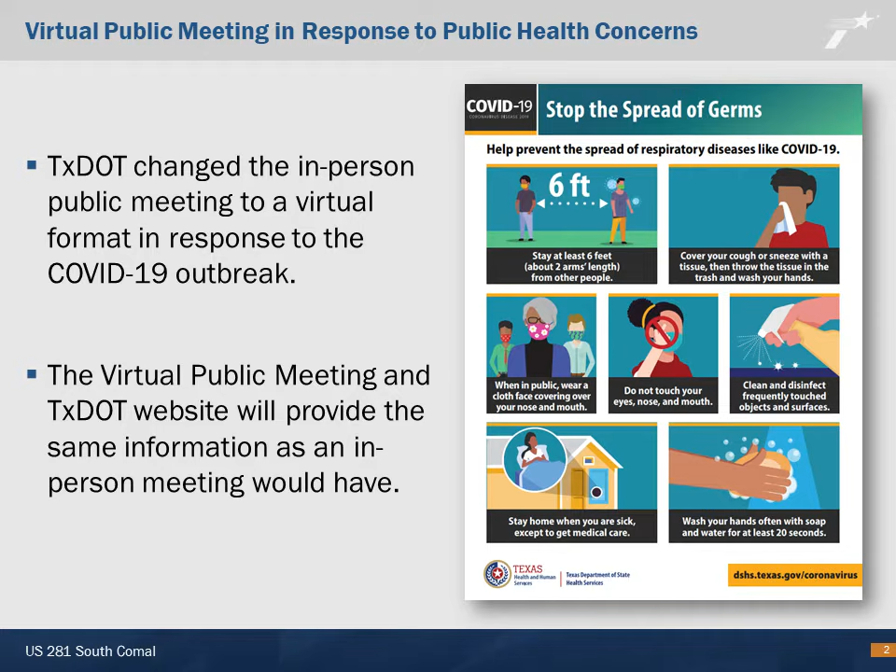Questions or comments may be submitted to the US 281 South Comal project team at any time during project development. However, to be included in the official public meeting record, all comments must be postmarked or received by Wednesday, June 2, 2021. Written comments may be submitted online as part of this virtual public meeting under the Participate tab, or may be submitted by mail or by email to the US 281 South Comal project team. Attention to Jackie Lopez at 5835 Callahan Road, Suite 200 in San Antonio, Texas 78228, or to US 281 Comal at

pozcam.com. Responses to comments received during the public comment period will be provided in a documentation of virtual public meeting report and will be available for public review on the project's website at www.TxDOT.gov, keywords US 281 South Comal, once it has been completed.

The limits of the proposed project are on US 281 from East Borgfeld Drive to SH 46 for a distance of approximately 6.3 miles. The project limits are located within the cities of Bulverde and San Antonio in Comal and Bexar counties. In order to construct the project and tie into the existing US 281 outside of the project limits, construction would extend approximately 0.2 miles south of East Borgfeld Drive and would extend approximately 1.7 miles north of SH 46.

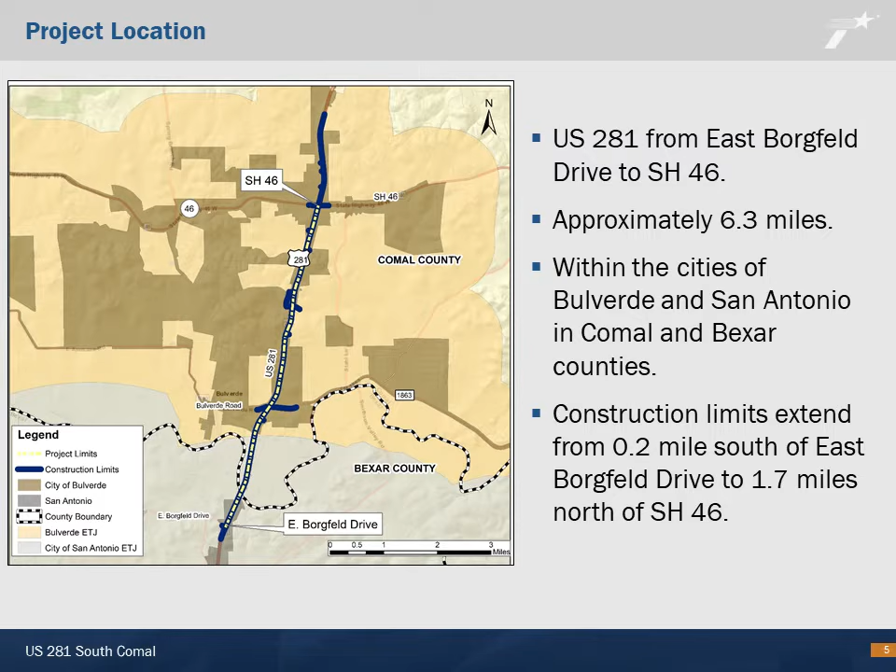Currently, US 281 is a 4-lane highway with 2 lanes in each direction and a large grassy median. The existing right-of-way width is approximately 225 to 315 feet. Within the project limits, there are currently no frontage roads along US 281, and the roadway operates as a non-controlled access highway. Drainage is accommodated by an open ditch drainage system. There are existing overpasses on US 281 at East Borgfeld Drive, FM 1863, and SH 46.

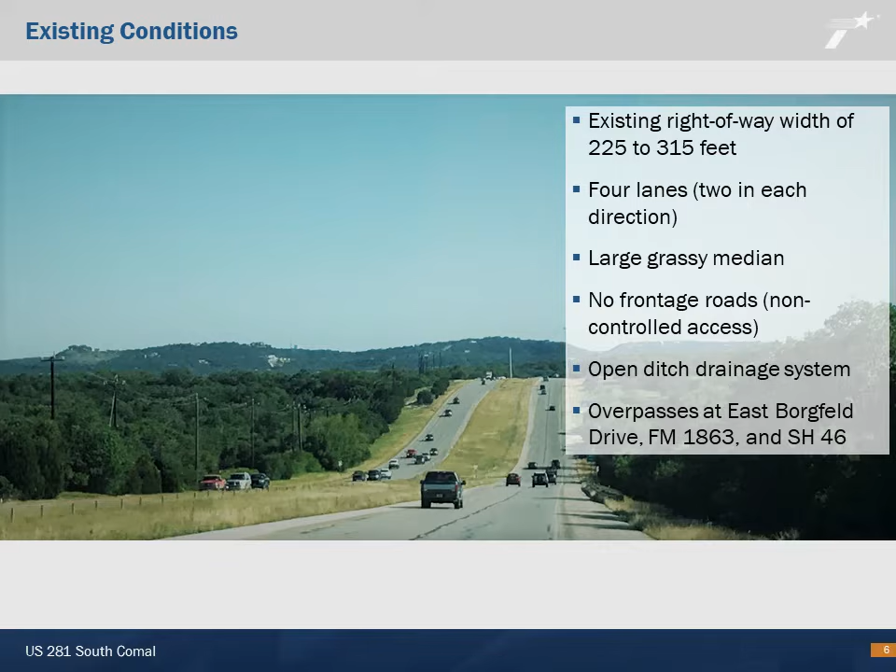Here is an existing typical cross-section of what US 281 typically looks like today. As you can see, US 281 consists of 2 12-foot travel lanes in each direction with inside and outside shoulders separated by a large median. No bicycle or pedestrian accommodations are currently provided along the corridor.

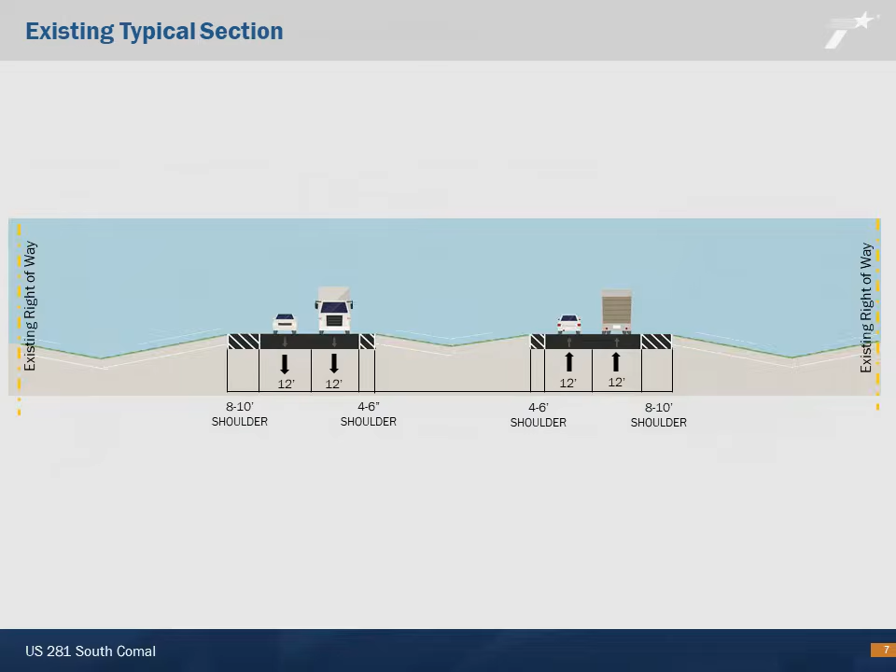The US 281 South Comal project is needed because US 281 between East Borgfeld Drive and SH 46 is experiencing population growth and an associated increase in traffic congestion, resulting in reduced mobility and safety. The increased population in the project area has led to an increase in the number of businesses, driveways, and cross streets along US 281, which increases the possibility for crashes along the corridor. The purpose of the proposed project is to relieve traffic congestion, improve mobility, and improve safety on US 281 within the project limits.

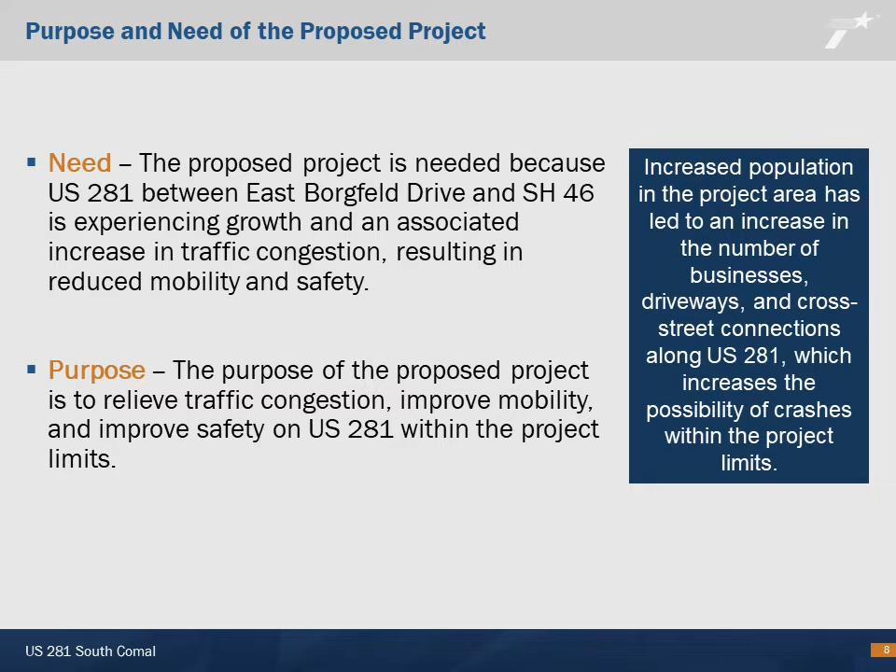Under implementation of the proposed project, US 281 would be expanded to a 4-lane freeway with 2-lane frontage roads in each direction, with space in the median that could accommodate future transportation improvements. Now, let's watch a short video that describes the major components of the proposed project.

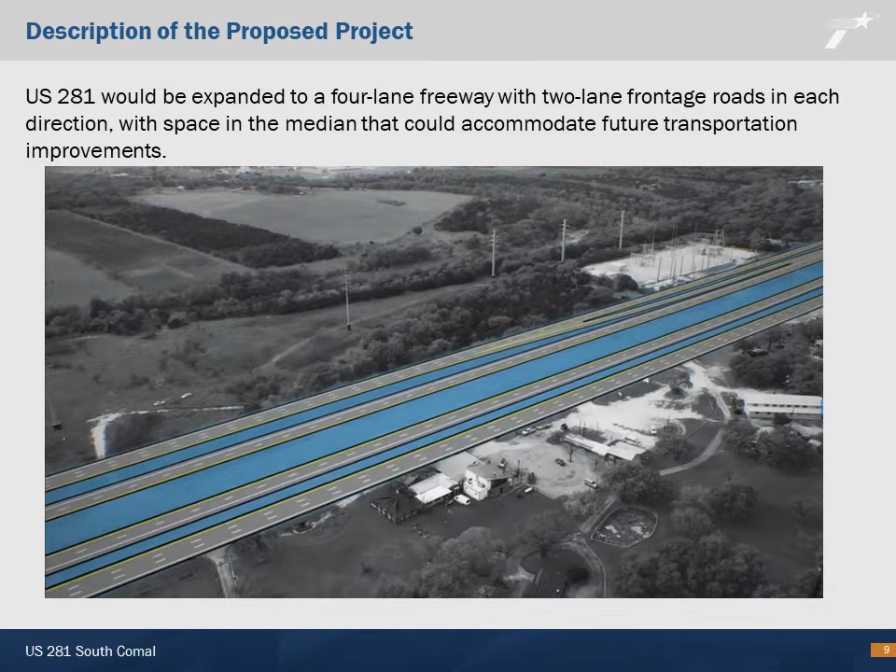Things are changing near US 281 in Comal County. The population is growing almost 5% every year. That's twice as fast as the Texas average. And over the next 30 years, traffic on 281 will double.

Many drivers already treat this road like a freeway, but it isn't designed like a freeway. With dozens of driveways in Comal County running directly into US 281, local drivers don't have enough space to merge on and off the road.

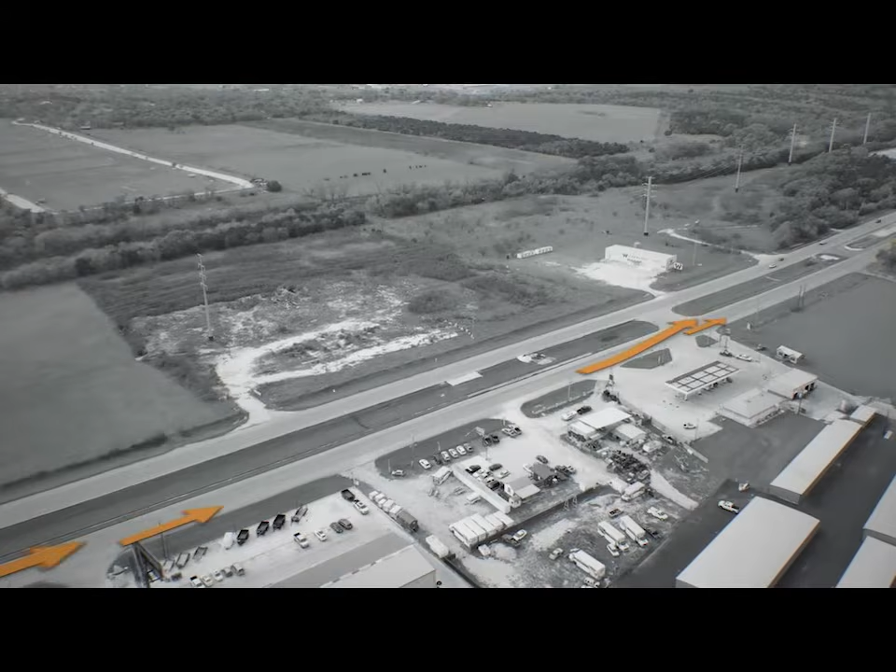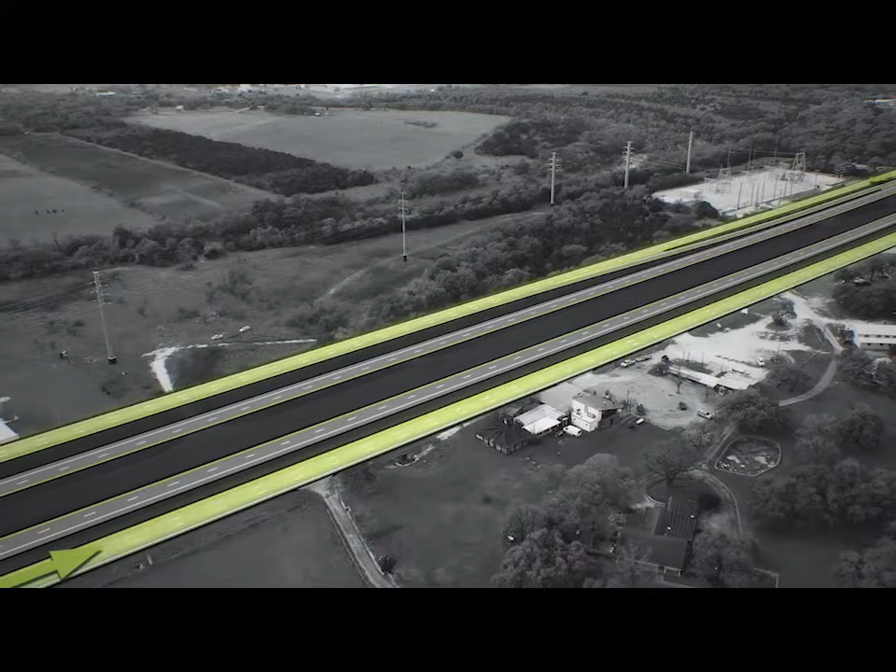To stay ahead of this growth and improve safety, TxDOT has been converting US 281 to a freeway in Bexar County and will now extend that freeway an additional 7 miles to Highway 46 in Comal County. As part of this improvement, new frontage roads will protect local drivers and driveways from faster commuters passing through the county. Existing interchanges will be adapted to the frontage roads to maximize efficiency for drivers.

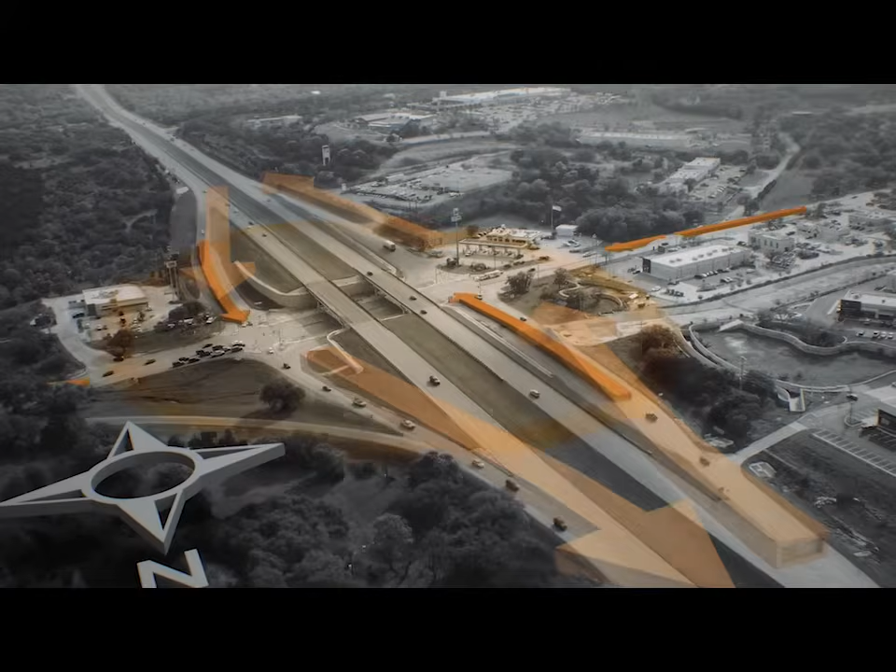For instance, at the current Highway 46 interchange, on and off ramps are in a standard diamond shape, which directs all merging traffic into the same area. The new design takes these entrances and exits and distributes them up and down US 281. This decreases congestion at Highway 46 while increasing access to businesses and neighborhoods along the corridor.

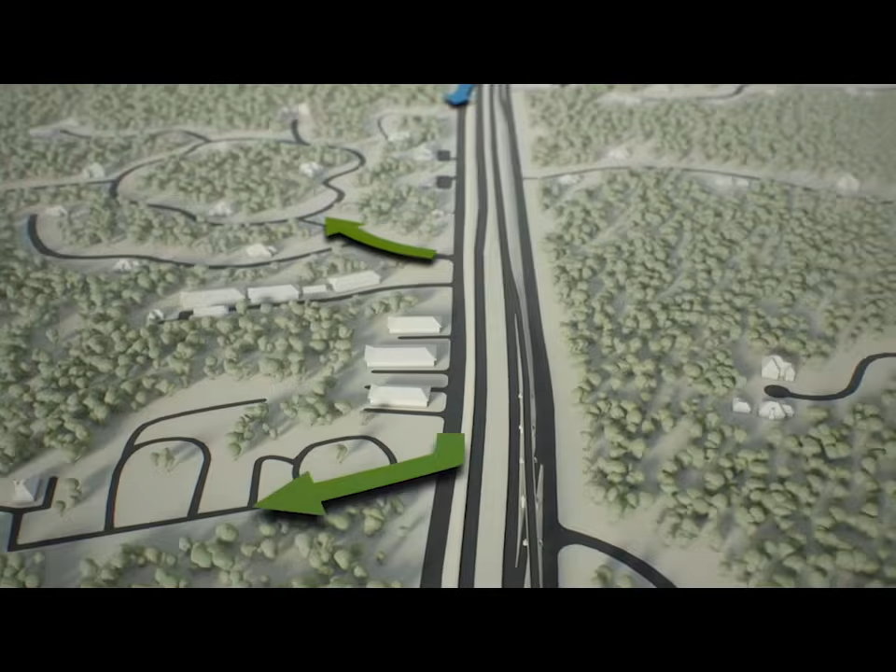In addition, the on-ramp near Bulverde will pass over the off-ramp. This configuration reduces cross-traffic on the frontage road while simplifying travel for vehicles getting on and off the new freeway. To the south, drivers on Casey Road and Mustang Vista will still be able to cross 281 thanks to a new connection under the freeway, making it easier and safer for east-west travel.

Computer models predict that keeping the existing design would lead to dramatic increases to travel time in the near future. The new design, however, virtually erases that increase, and this difference will become even more notable in the years that follow. Meanwhile, separating high-speed from low-speed traffic should reduce driveway-related crashes by 63%, while the Casey Road overpass should reduce nearby crashes by 65%. Not surprisingly, these significant upgrades will require us to widen the road.

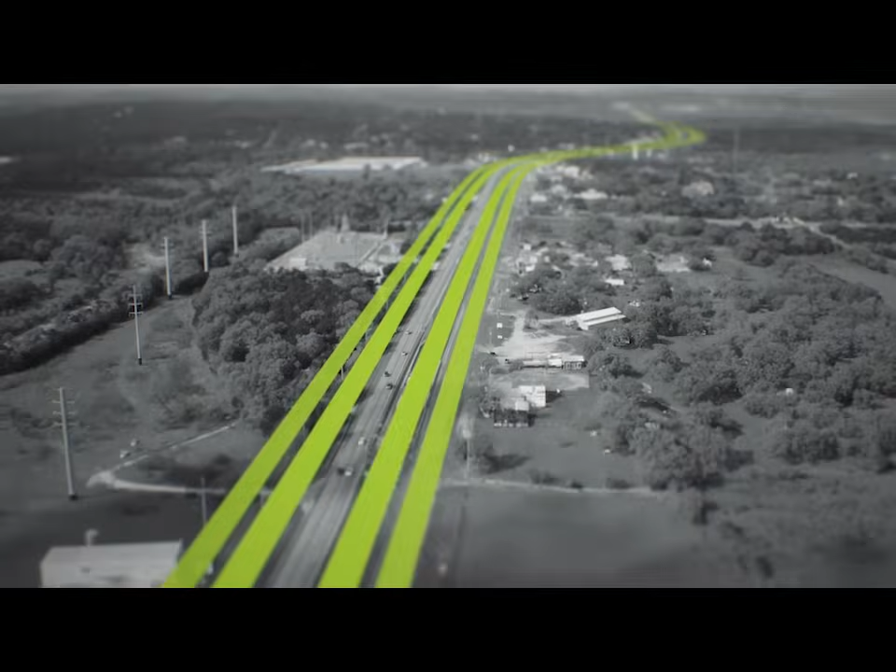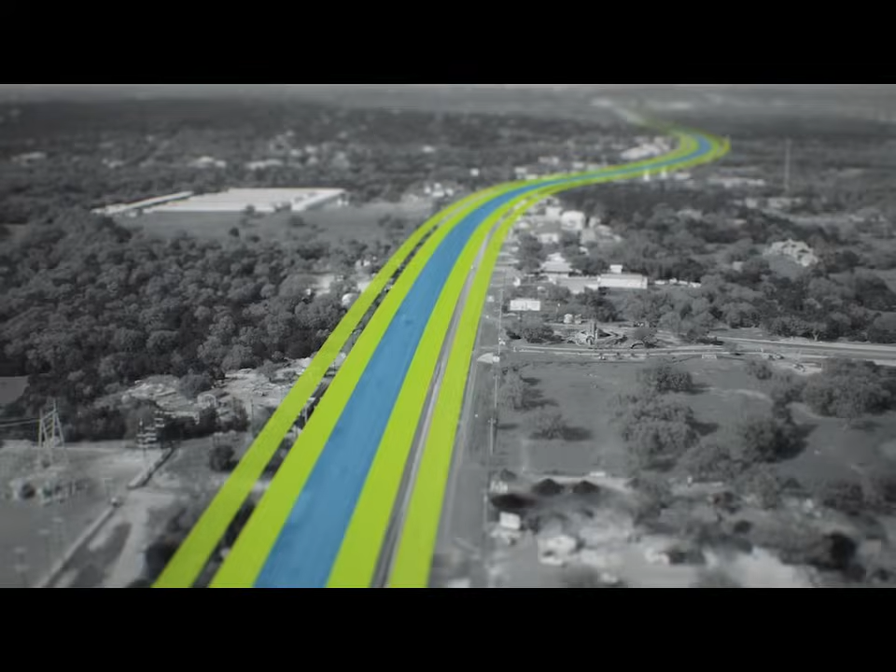And we've been working hard to minimize this impact on surrounding areas. For instance, rather than simply widening equally on each side of the road, the new freeway and frontage roads move back and forth in relation to the existing road, adapting to natural features and properties. The improved design also incorporates extra space between lanes. This will allow us to make future improvements without changing the new footprint.

Extending improvements on 281 into Comal County will lay the foundation for transportation needs in this area for decades to come. Another example of how TxDOT is connecting you with Texas.

As you just saw in the video, the proposed US 281 would consist of a 4-lane divided freeway with 2 lanes in each direction, as well as one-way frontage roads with 2 to 4 lanes in each direction. Auxiliary lanes would also be provided throughout the project limits on the main lanes and frontage roads where needed. At cross streets, intersections, and major driveways, turn lanes would be provided.

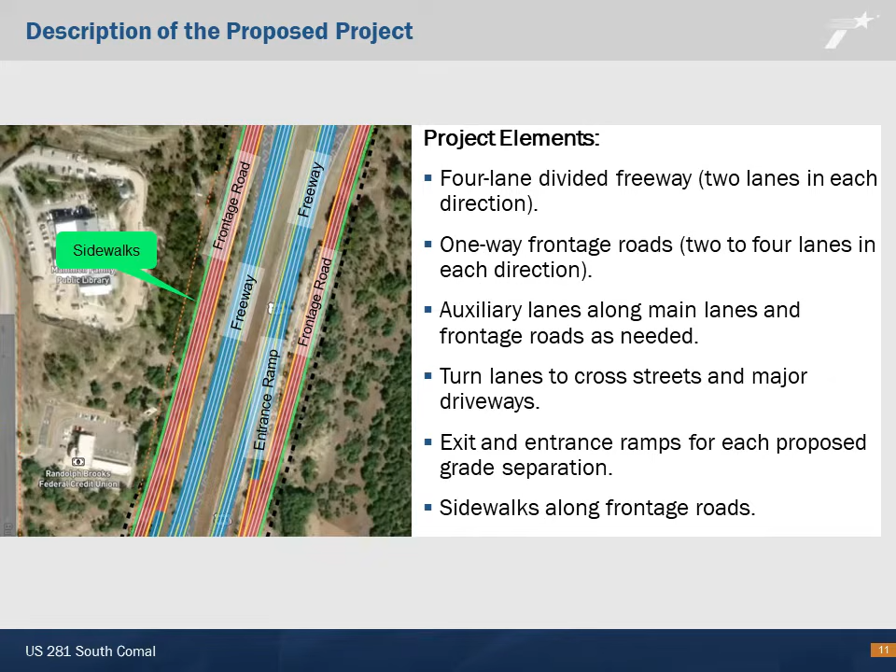Exit and entrance ramps would be constructed at strategic locations along the corridor to allow vehicles to enter and exit the freeway. These ramps would be placed in locations that allow for access to the major intersections at the proposed grade separations. Lastly, sidewalks would be provided along the frontage roads.

As we've touched on, there are existing overpasses on US 281 at East Borgfeld Drive, FM 1863, and SH 46. At East Borgfeld Drive, an overpass is currently under construction. This overpass would remain in place under the proposed project. At FM 1863 Bulverde Road, the existing overpass would be improved by adding frontage roads and approach and departing lanes.

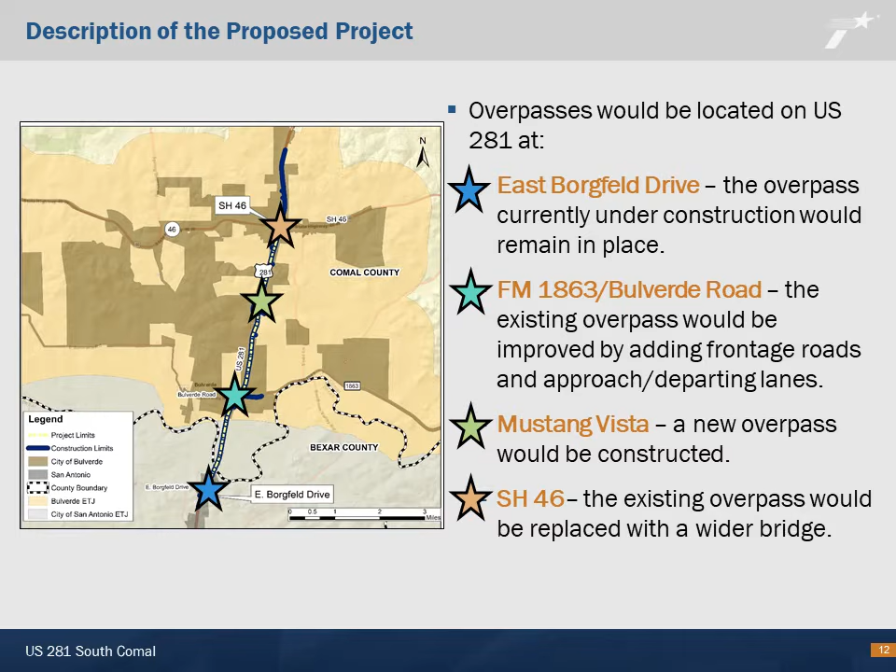At SH 46, the existing overpass would be replaced with a wider bridge to accommodate auxiliary lanes and future expansion. A new overpass would be constructed at Mustang Vista, as was described in the video that was previously shown. The project would also include widening of FM 1863 from US 281 to east of Wiley Road.

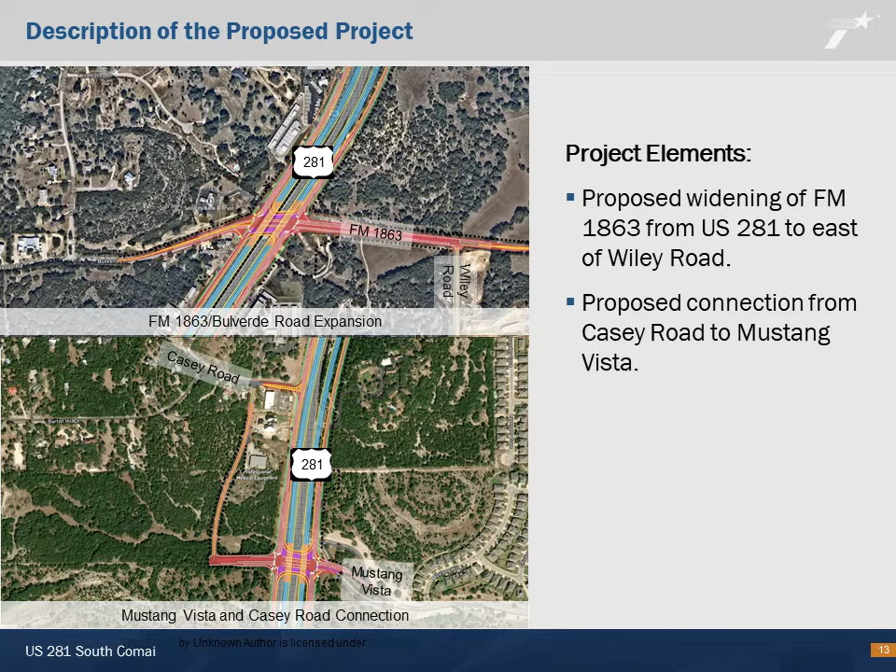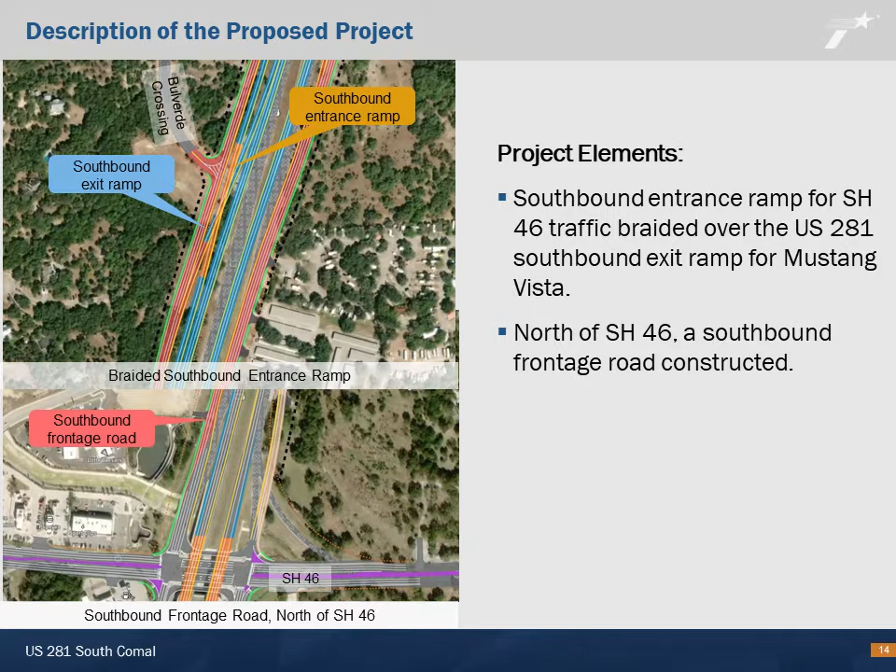In addition, a new extension of Mustang Vista on the west side of US 281 would be constructed, which would provide a connection from Casey Road to Mustang Vista. A southbound entrance ramp for traffic traveling from SH 46 would be braided over the southbound exit ramp for Mustang Vista. North of SH 46, a southbound frontage road would be constructed.

The proposed right-of-way width is approximately 400 feet, but varies down to 315 feet and up to 450 feet in certain locations. The proposed right-of-way line varies from approximately 0 to 200 feet from the existing right-of-way line, depending on the location.

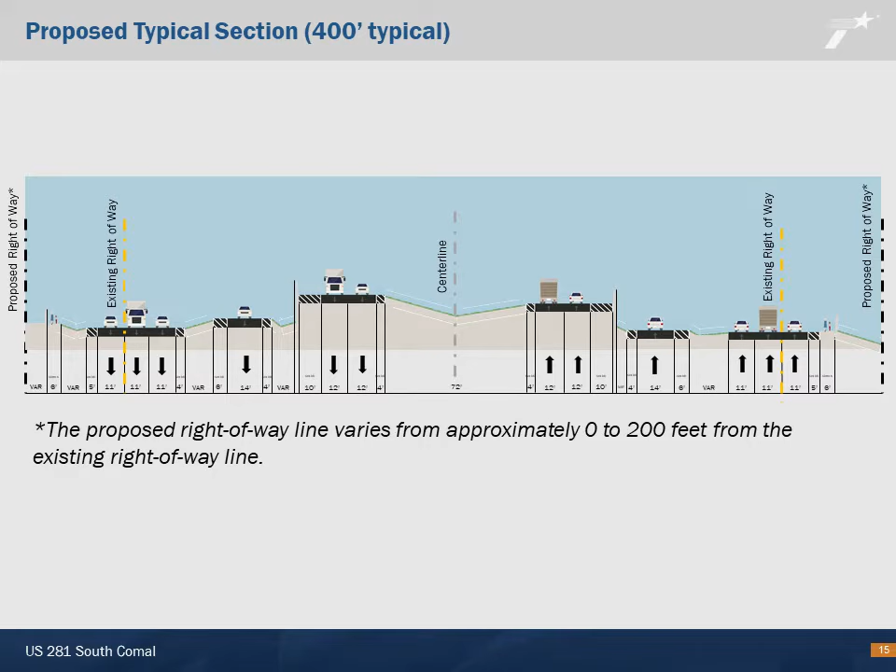One of the purposes of the proposed project is to improve safety on US 281 within the project limits. Many project elements are proposed that are anticipated to improve safety along the corridor. These include constructing an overpass at Mustang Vista, constructing frontage roads that provide access to driveways and cross streets, upgrading US 281 to meet freeway design standards, and providing sidewalks and crosswalks for pedestrians.

By upgrading US 281 to a freeway with frontage roads, local traffic would be separated from through traffic. Under the proposed project, vehicles would enter and exit driveways from the proposed frontage roads, which would have lower traffic volumes and speeds than what exists on US 281 today.

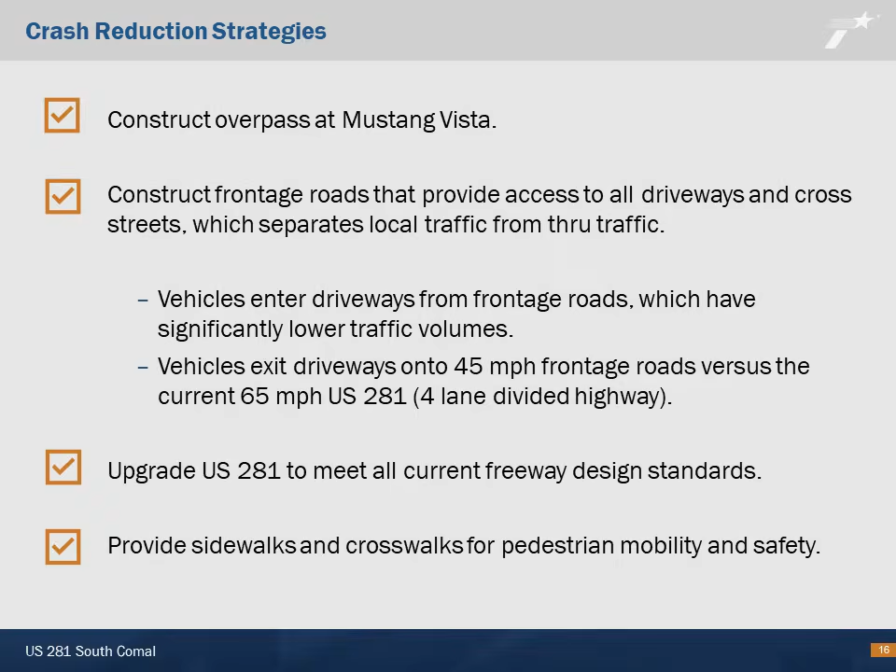Now, let's dive a bit deeper into the traffic analysis that was conducted as part of the project. Population and traffic growth have been occurring in Comal County and along US 281. Traffic projections done for the project anticipate that this trend is likely to continue into year 2049. In 2019, traffic volumes at US 281 and FM 1863 were approximately 62,000 vehicles per day, and at US 281 and SH 46 were approximately 57,000 vehicles per day.

Using predicted population growth rates for the area, future traffic volumes were projected for the corridor. This analysis indicates that by 2049, traffic volumes at US 281 and FM 1863 would increase to approximately 108,000 vehicles per day, which relates to a 74% increase from existing conditions. Similarly, at US 281 and SH 46, traffic volumes are anticipated to reach approximately 97,000 vehicles per day in 2049, which is a 70% increase from existing conditions.

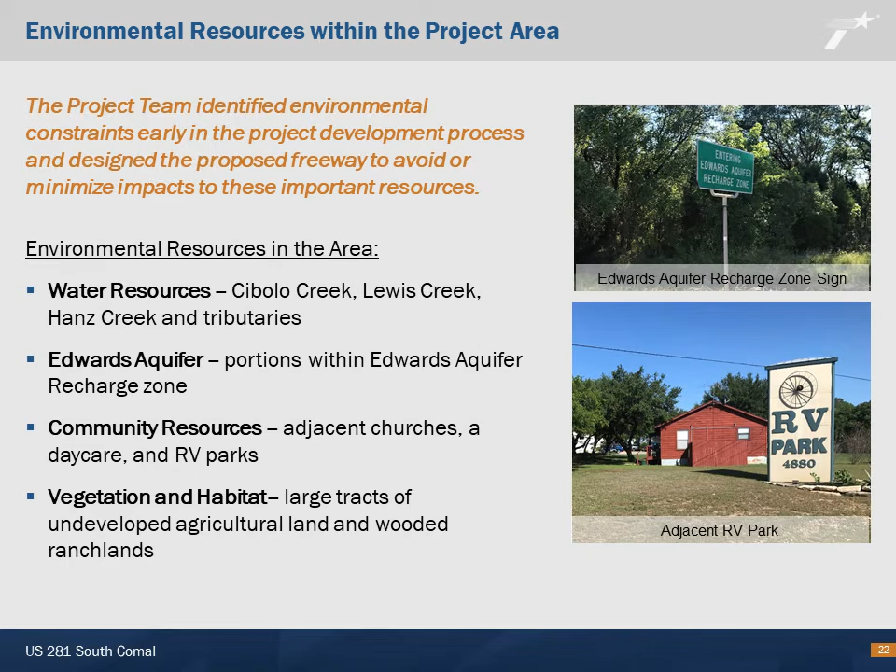A summary of some of the environmental resources located along the US 281 corridor and project area include several creeks and tributaries, the Edwards Aquifer Recharge Zone, adjacent churches, a daycare, and RV parks, and large tracts of undeveloped agricultural land and wooded ranch lands. Other environmental resources include an adjacent private cemetery and historic age structures, several noise-sensitive receivers, adjacent gas stations, fuel tanks, and auto repair shops, and portions of the project within a non-attainment area for ozone. Maps showing the environmental constraints in the project area that were considered during project design are available for download and review under the Review tab of the virtual public meeting.

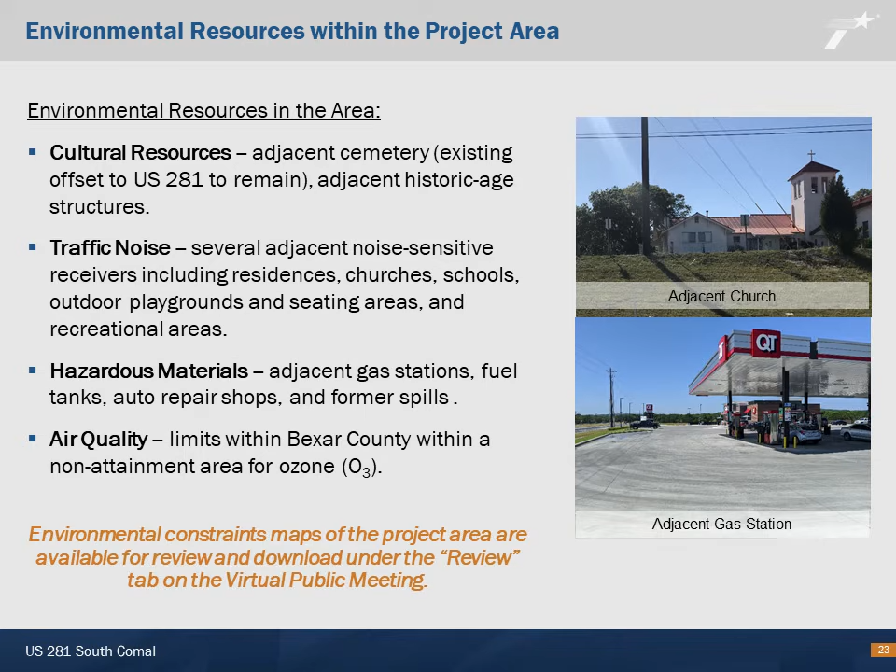The US 281 South Comal project involves environmental analysis of the project under the National Environmental Policy Act of 1969, also known as NEPA. Several environmental studies will be prepared to identify, minimize, or avoid and mitigate potential project impacts to environmental resources. This includes studies on biological resources, water resources, cultural resources, community impacts, traffic noise, hazardous materials, air quality, and indirect and cumulative impacts. After environmental studies are complete, the project team will coordinate with various resource agencies as necessary, including potential coordination with the U.S. Fish and Wildlife Service, Texas Parks and Wildlife Department, U.S. Department of Agriculture, U.S. Army Corps of Engineers, Texas Historical Commission, Texas Commission on Environmental Quality, and others as appropriate.

Following completion of environmental technical reports and agency coordination, an environmental assessment document will be prepared that summarizes any potential project impacts to environmental resources, as well as provides avoidance and minimization measures as needed. The draft environmental assessment and the technical studies will become available for public review and comment upon their completion at the project's public hearing. The US 281 South Comal project began in 2018. The project team conducted an extensive alternatives analysis for the project and vetted several alternatives based on feedback from the city of Bulverde and Comal County, as well as the avoidance of impacts to environmental resources, adjacent properties, and the topography of the project area. A preferred alternative was selected, and the project team held meetings with potentially affected property owners in mid-2020 to early 2021 to discuss the proposed improvements and garner feedback on the project.